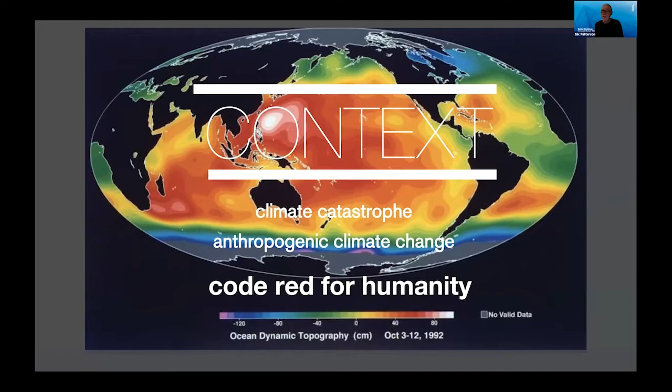I'm kind of hung up contextually on this ongoing climate catastrophe. I have a difficult time getting beyond this, and the most recent report, which the UN Secretary General called a code red for humanity, if you haven't had a chance to take a look at it, didn't have a whole lot of really new revelations in it. But it does compress the time frame. This thing is happening faster than the scientists anticipated, and it's a big deal.

So we all got wrapped up in the pandemic, of course, and I know that myself and others that I've talked to paid a little bit less attention to what was going on with carbon. We made the assumption that with the global economic shutdown, we had to have at least something of a drop off in carbon emissions. And the good news is that we did, in fact, but the bad news is that it was not much.

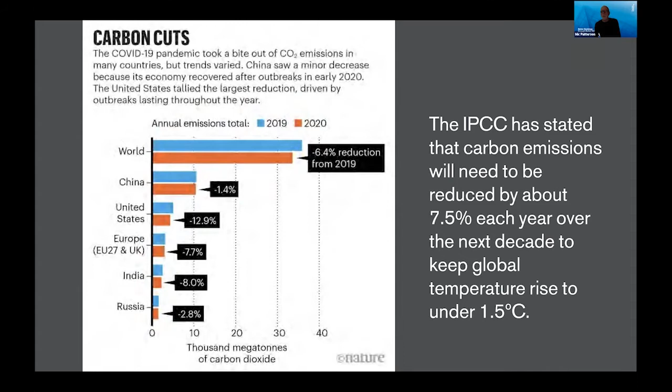And in fact, the IPCC has already stated that we need to reduce carbon emissions by about 7.5% each year over the next decade to keep global temperature rise under 1.5°C. And in fact, last year, with a global economic shutdown, our reductions did not reach that 7.5 level. So this is very alarming and concerning.

One of the interesting things is that there are these constant revelations, discoveries in things that we're doing wrong in buildings, embodied carbon being one of those things that is relatively recent, emerging in the dialogue, particularly over the last 5 years. Another one of these things is thermal resilience. And my friend Ted Kesik at the University of Toronto was just involved in the release of this thermal resilience design guide, which I think is really quite interesting, especially in the context of the wildfires that we have going on out here on the West Coast.

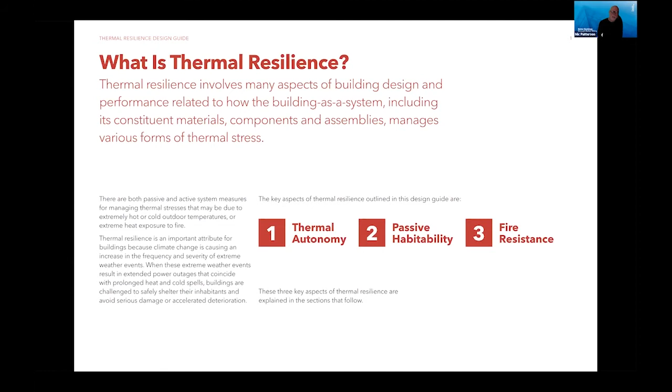And we had temperatures approaching 120 degrees in Portland, Oregon this year. And consequently, I find myself thinking a lot about the ethics of what we're doing, what we're about. And there's this concept of non-maleficence, which is basically an ethical obligation not to harm anyone, right? Which manifests in the Latin phrase that translates as "first do no harm," which we're all familiar with. It has been picked up largely by the medical profession.

We are builders of buildings. This is our industry, and our buildings are problematic. In fact, they're killing us both directly and indirectly. We are all aware of the fact that buildings contribute close to 40% of the carbon emissions that are such a problem.

And this concept of passive survivability in buildings: what happens when the power goes off and you've got a substandard facade system in place, and in a very, very short amount of time, people are in trouble in these kinds of dramatic climate events that are increasingly taking place. So, I'm rooting for disruptive transformation. We have to go through a transformation in the built environment.

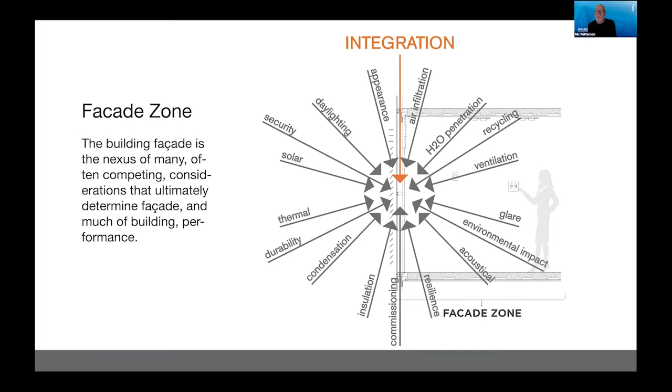And what I mean by that, this is a couple of handfuls of these considerations here, by no means exhaustive, but I think it's really indicative of the uniqueness of the facade system in buildings. And you have considerations like daylighting and glare, which can be in opposition to each other and have to be balanced. Many of these things, in fact, have to be balanced to achieve a fully integrative and optimal outcome in facade design. It's very challenging.

In fact, we spend, according to the EPA, pre-pandemic, 90% of our time indoors. So the indoor environmental quality obviously is of great relevance, and the facade system has a huge impact on that indoor environmental quality. And post-pandemic, I'm sure that it's been significantly more than 90% of the time that we spend indoors.

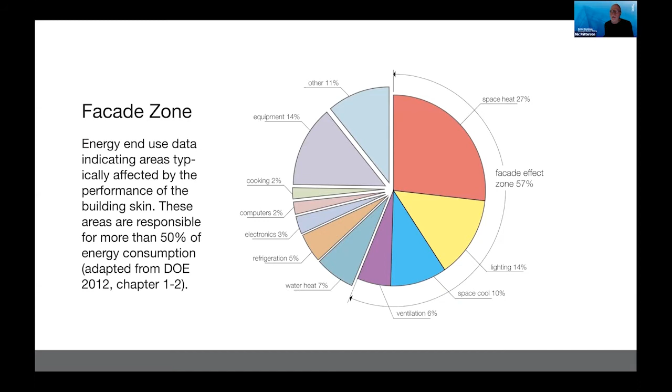From the standpoint of energy consumption, you don't have to go any further than the Department of Energy's statistics to see that in buildings, the facade system has a huge impact, affecting more than 50% of that energy consumption. And as an industry, we've developed a number of strategies and technologies to deal with these kinds of things, ranging from the facade systems themselves to material types, glass types, and integration with shading systems and sensors and controls on the interior.

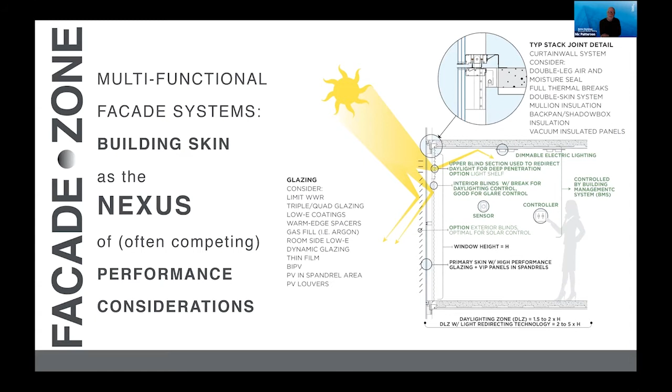So, I was at an event a while back. Bjarke Ingels with BIG Architects was a keynote speaker. And he made a statement that I thought was striking. He said, sustainability is a design problem. And I really hadn't thought about that, but it certainly is, right? Sustainability and resilience both are design problems, which puts us as designers in the driver's seat in terms of solving these problems. And what this is really about is innovation, right? And so we're going to talk a little bit about that today, but I'm talking to a bunch of innovators already, obviously.

We must innovate our way to resilience and sustainability in the built environment. To get from where we are to where we need to go requires massive innovation, right? But how well do we understand what innovation is? And I talk to a lot of people. I oftentimes am not talking to a group like this, which is largely a group of innovators. I talk with a lot of industry people, and even ourselves as creatives.

It's like we've polluted the language, right? A lot of the words that we use, words like sustainability, resilience, high performance, innovation, we think we're communicating with each other, but when you really strip it back, words like sustainability, it's kind of like talking about God, right? You can talk about it, but everybody that you're talking with has a different idea in their mind of what that really is, what it represents. And we've sort of failed to converge on clean definitions for these things, and it's really compromised our ability to communicate about these things, right?

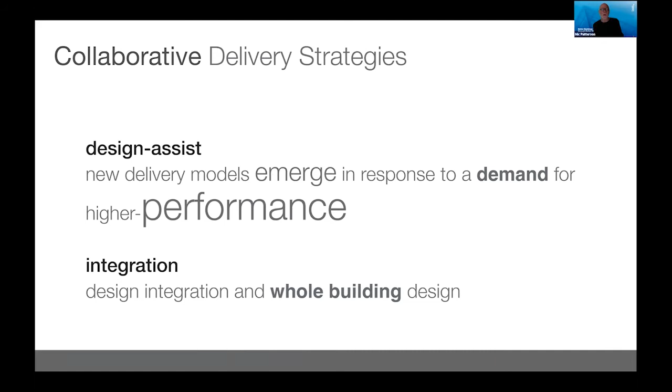And these are represented by Design Assist, which I'm sure many of you have heard of, and probably many of you have participated in. This is another one of these terms that there is no clear definition that we've converged on, right? And so, depending on who you talk to, it'll range from true collaboration to involving expertise as early as possible in the design phase of a project, and getting them to do as much work as possible for free as early on as possible. And that's what I call business as usual, not design assist. But that's a whole other thing.

And then there's a really important aspect of market dynamics that's going on. And there's always this push-pull, right? You've got industry that is pushing products that are ready for adoption, and they're not being adopted. And then conversely, you can have a market dynamic where the design community is begging for, asking for, pulling for new product innovations out of industry.

And where we're at right now, it's been changing a lot. If you look at this historically, there have been long entrenched patterns, but lately these things have been changing much more frequently. But we're definitely in a situation now where it's a push. And what that means is that there are higher performing technologies that are really important that are not being adopted and used in buildings. Part of this is because of a lack of codes that would necessitate their interest. And part of it is a lack of awareness and specification practices, but it's a problem.

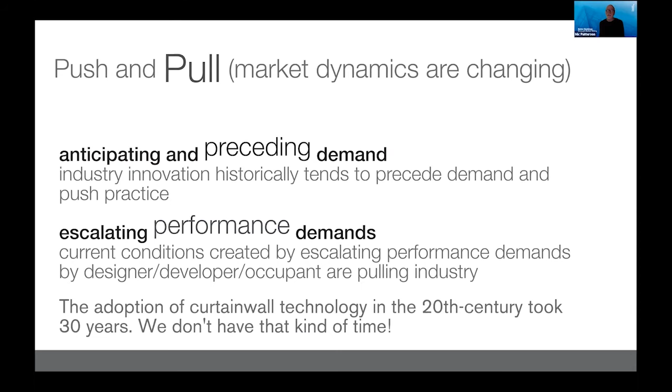The adoption of curtain wall technology in the 20th century took 30 years. In the early 20th century, there were some really innovative curtain wall projects that were executed, implemented. The technology was there, demonstrated successfully, and it wasn't until into the 60s that the technology really took off. In sometimes not so great a form, but that was the time frame that it took off.

So innovation is not something that is magic, like a lot of people look at it, and a lot of you understand this, right? You really have to set the stage for innovation. You have to build the innovation machine. You got to put the dials in place. And once you've done that, you can innovate predictably, reliably, and in a manner that manages the risk that goes along with innovation. This can look very different depending on the kind of organization that you are.

For my own personal exercises, this involved putting together a multidisciplinary team of collaborators, if you will. And we would do research. We integrated research with everything that we were doing. Every project that we did involved research. And a key part of that was starting with the right questions, the best questions. We always took time for blue sky investigation. We always started with a blank sheet of paper. We made sure that we had the right tools for the job for all of our people, no matter what they were doing. And we spent the money to have the right tools.

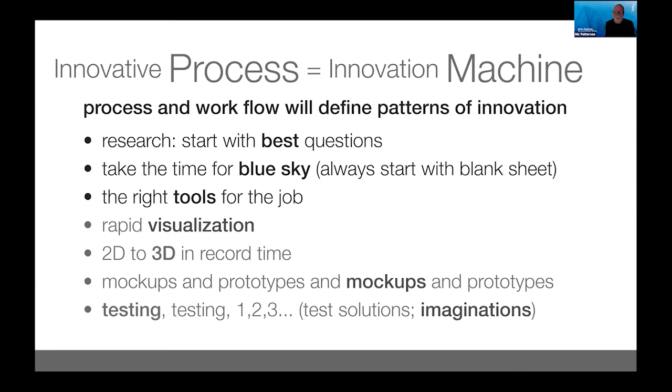So, there are these things. This stuff is stuff that I pulled from a half-day or full-day innovation workshop that the Institute does. So there's not an opportunity here to get into this kind of thing.

But we've all heard this, reward failure, right? But how well do we execute there? How well do we do it? It's not easy to do. And again, it's a principle that's not well understood. It doesn't mean that we let people fail, make the same kind of mistakes over and over again, but carving out room to make these kind of failures and going after them and celebrating them and learning all that they have to teach us is hugely important.

There's some shortcuts, right? I'm into shortcuts wherever I can find them. We need shortcuts now, right, to get to where we need to be in the built environment. Imitation is a great behavior, I think. And the trick is in selecting the source of imitation. So if we're going to imitate something, let's make sure it's the best thing that we can imitate. And then let's push the envelope of that and make it ours, own it, take it to the next level.

And find the drivers of change, right? This is really important. And these are going to vary depending on the project and where you are, and many factors like that. But they can include things like fuel costs. We're all familiar with budget, performance requirements, sustainability. I mean, I've been around for a while, and I recognize the fact that we've been burdened in the U.S. by lax building codes and cheap energy prices.

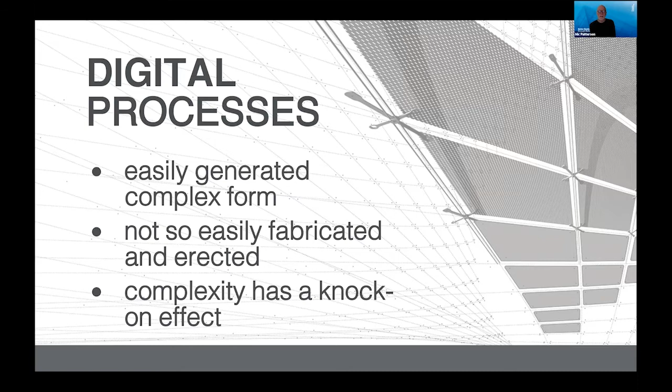So, this complexity manifests in different ways as we move closer to the actual implementation and construction of a building. So they're not so easily fabricated and not so easily erected, some of these innovations. Digital processes have enabled what architecture critic Peter Blake called wet dream architecture, and that's where we're seeing the complexity impact. It's one of the biggest trends, right, in architecture today.

Two big trends that we all recognize: geometric complexity in the building skin, hugely amplified, and also materiality, right? The palette of materials in the building skin. It's not all aluminum and glass anymore, right? These are two of the big changes. And of course, one of those materials that is being investigated at ACAW so beautifully is the terracotta thing.

Complexity versus ingenuity. I mean, basically we are, I believe, as designers, obliged to consider the simplest solution to any given problem and to move from there. And I see evidence constantly of skipping that.

So, design trends that are ongoing: the exploration of thin skins versus deep skins. We saw some deep skin work today. I think of the work of Morphosis and the layering of the facade system, to the point where sometimes it gets hard to tell where the actual barrier between indoors and outdoors is. And there's all kinds of functionality going on there, including the incorporation of public space sometimes in deep double skin structures, like the Shanghai Tower comes to mind, Gensler's project.

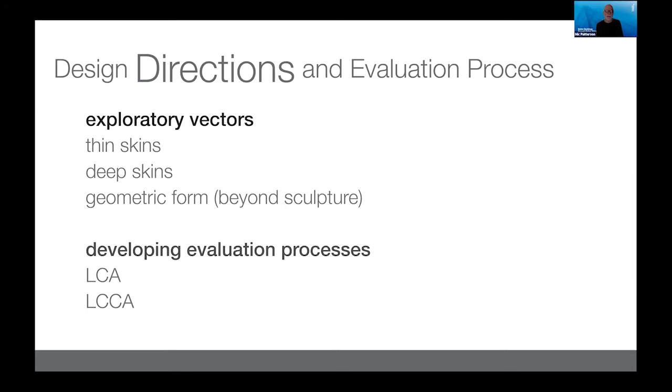And this is LCA work. And then the costing part of it needs to be in a life cycle context, and that's life cycle costing assessment. So materials and processes are a big deal to me.

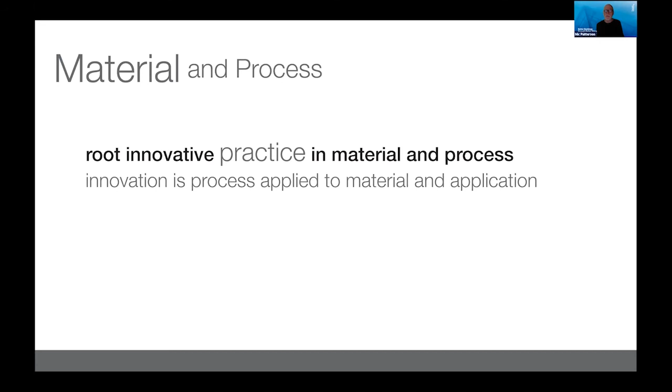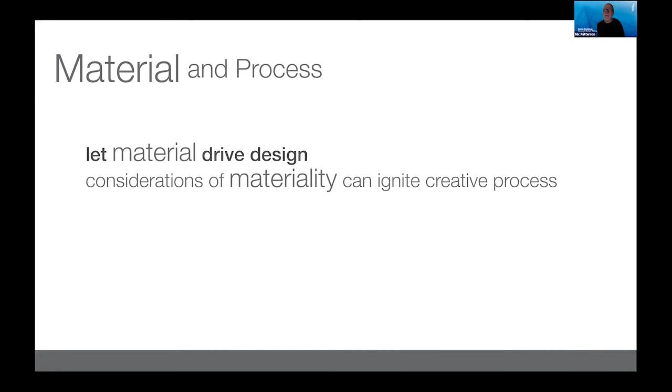Root innovative practice in materials and process. That's always been where I start a design problem, and especially if I'm stuck in a design problem, I look to materials to drive the creative process. And that has been amply demonstrated by the teams today working with these terracotta materials. Deep design is informed by material and process.

And the thing that is alarming to me, as both a practitioner and an educator, is the educational system for our designers, for our architects, in my opinion and my observation, is not very robust when it comes to an understanding of materials and processes. And I think that's something that we need to work on. It's something that my colleague Sanjeev Tanka and I are working on at USC with a facade educational program that we've got in the works there.

Material and product trends, all right? Just a quick look at these: advanced glazings. We know about these vacuum insulated panels, building integrated photovoltaics. We've been hearing about that for a long time, not a whole lot of development or implementation there. Formable materials. I talked a little bit about this already, terracotta being one of these.

The metallic stainless steel, copper, bronze, and more we're seeing in the building skin. Think of the screen system on the African American Museum in DC. Even silicone and silicone joints. There is significant room for innovation in the most mundane-seeming materials and processes. Curtain wall assemblies, we need significant developments there, particularly with the framing and the thermal performance of the framing with thermal breaks and this kind of thing.

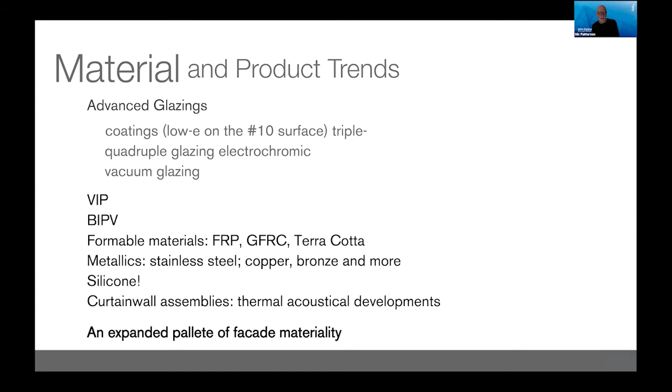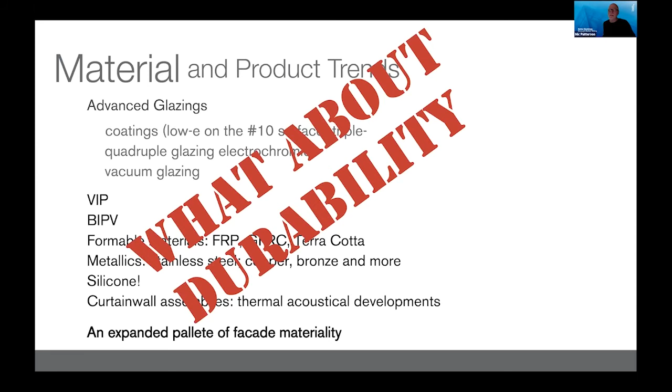So it's important to ask the right questions, right? So revisiting these materials, a question that too often doesn't get asked is, what about durability? That question has been asked and answered with the terracotta material, which is really cool, but in a lot of cases it hasn't been, right? So as an example, let's take a quick look at the insulated glass unit. You have these materials here in the facade system.

In the insulated glass unit, you've got glass, and whatever your spacer is, oftentimes it's aluminum. Increasingly that's being replaced by warm edge spacers. But you have these materials of basically float glass and aluminum. Float glass is an amazing material, right? In addition to its transparency, it is essentially infinitely recyclable. And it has a durability in the building skin that is indefinite. Until it's broken, it's there.

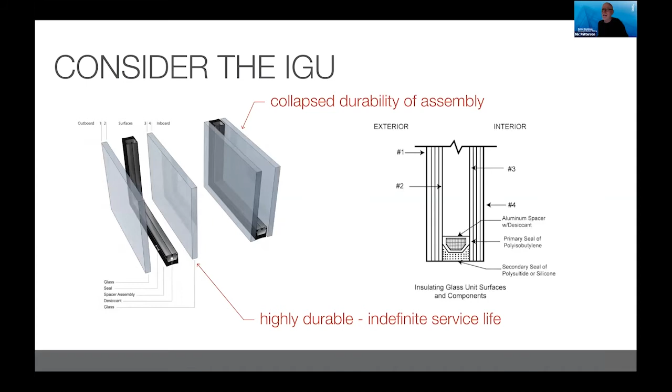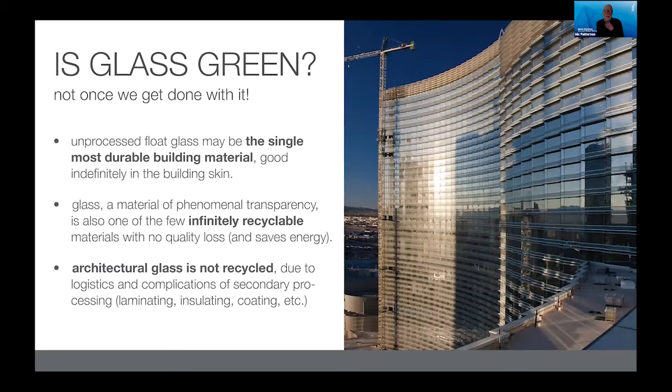So what do we do to compensate for the weaknesses that we're familiar with in glass? It's a poor thermal and acoustical insulator. It has a strange behavior with breakage. So we develop the insulated glass unit, and we take this material that is infinitely recyclable and just incredibly durable. We make the IGU, we collapse that durability down to a 20, 30-year time frame. We make it not recyclable in the process, and we call it high performance glazing.

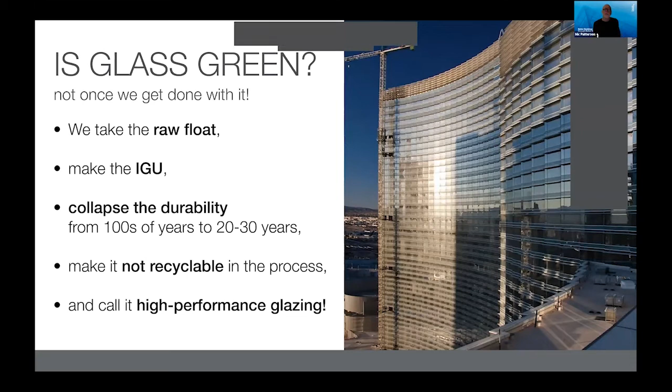This is one of the problems with the nomenclature that we use again, right? We're not considering durability, obviously, or we wouldn't call that high performance glazing. So let's see here. Okay, there we go.

So this is a conceptual exercise that I did myself, and I hold this as an example only of letting constraints drive you to places that you wouldn't ordinarily go. I did a paper on this. It's just conceptual, not intended to be developed for an actual product, but trying to force myself to get my head around: if I'm going to do a product that has the kind of durability that I'm looking for, if it's going to be fully recyclable, you can't be doing low-E coatings. It's got to be disassemblable.

And the constraints drove the design here, right? So this is basically an IGU that you can take apart, and it's not a sealed cavity IGU, which also eliminates the problem of the oil canning of the glass because of the differential pressure. It ended up having some interesting advantages.

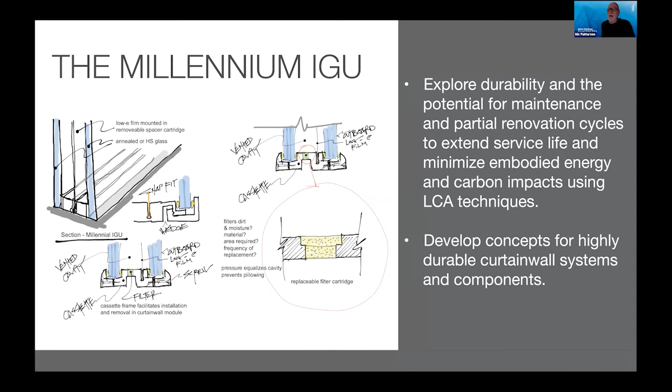I called it the MILLENNIUM IGU because I was initially going after an IGU that would last for 100 years. And once you solve that problem, you realize that 100 years doesn't matter, it can keep going, right? So I called it the MILLENNIUM IGU. And the idea is to design facade systems and assemblies in the facade systems so that, if we don't have the economic wherewithal 20, 30, 40 years down the line, our buildings are still going to be there.

We've got buildings that have been poor performers from day one in the New York environment, for example, that are badly in need of facade renovation and don't get it because the process is so costly and disruptive, right? So we need to really think about this and make this easily accommodated, because these haven't happened during the past decade in New York City in good economic times, right? So we don't want to burden future generations with bad designs. That's going to be a problem.

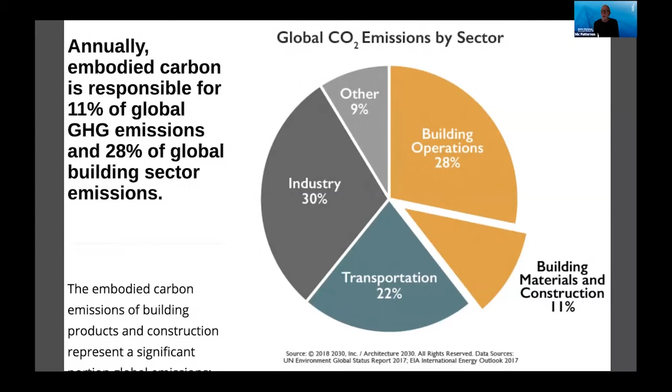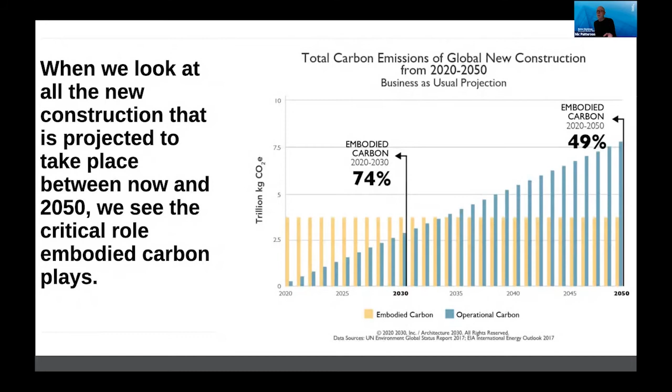So 74% of the carbon represented in this graph here is achieved by 2030. So the operational part pays off over a long period of time. Our focus has got to be on the near term. This is what this IPCC report is telling us. We have even less time than we thought we did to get this under control. So our focus has really got to be on carbon, and embodied carbon is a big part of this.

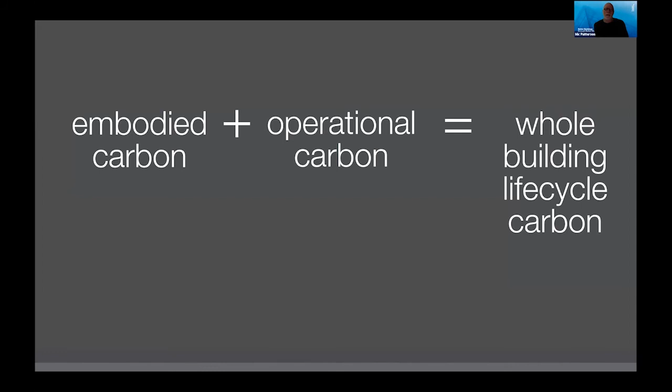So it's pretty simple, right? Embodied carbon plus operational carbon equals whole building life cycle carbon. Pretty simple. This is my contribution to higher mathematics here, right? It's like E equals MC squared. But it does change everything, right?

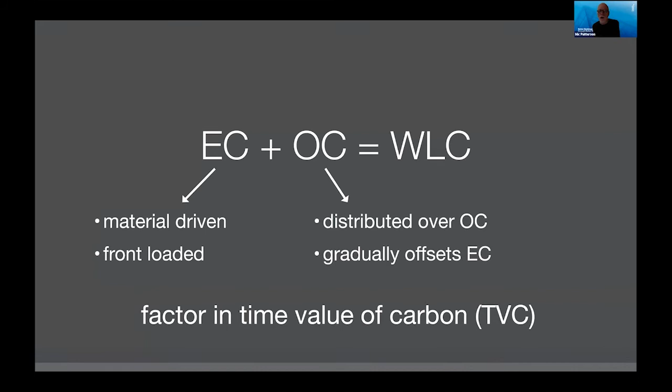And why? Because, this is interesting to me, during most of my career doing facade construction, design and build, we totally ignored the EC part, right? As we were working on improving the OC part, the operational carbon, we ignored the embodied carbon. And the embodied carbon is front-loaded, material-driven. The operational carbon is distributed over the life cycle of the building and gradually offsets the initial embodied carbon load. This time value of carbon makes it critical that we understand this and focus on this.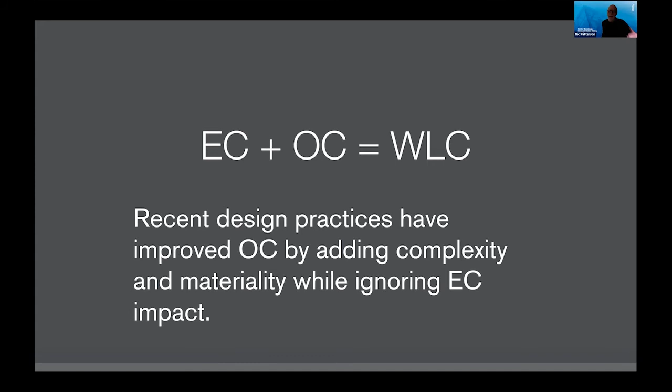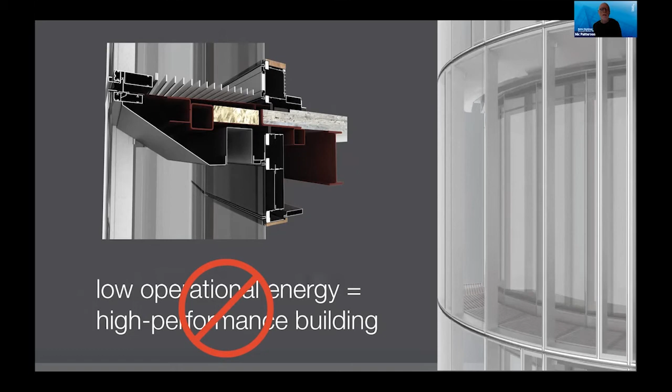And this is a big problem when you're on a mad building streak like we have been over the past decade. So the design practices that I'm talking about have improved operational carbon by adding complexity and materiality while ignoring the embodied carbon impact. So we just completely left that part of the equation off the table, and we would build double skin facade systems with significantly amplified materiality to achieve this operational carbon performance. It was a big oversight. I wonder what other oversights we're currently making.

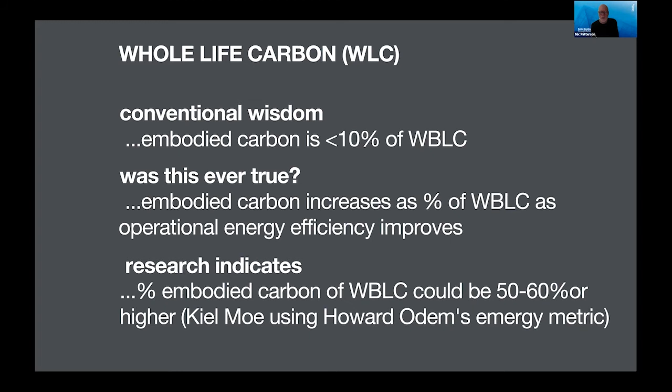So the conventional wisdom at the time was that embodied carbon was less than 10% of whole building life cycle carbon. I suspect that this may never have been true. More recent research indicates that it's oftentimes 50 to 60%, sometimes even higher, depending on a variety of circumstances. My research has been at the center of resilience, preservation, and building science, and it's really focused me on this issue of durability. And when we talk about service life and embodied carbon, material selection and extended service life are the most effective means of reducing embodied carbon footprint, right?

So if you extend the service life of a building or a building assembly, if you double that service life, you essentially halve the embodied carbon. So service life is a really critical factor. It's something that we haven't talked about. I've been involved in LEED platinum building projects that did not even define the service life for the building.

And there's, again, no convergence on how long a building should last or how long the facade system should last. I did some research on this, and for the buildings, it's everywhere from 15 to 30 years at the low end to Anthony Wood with the Council for Tall Buildings and Urban Habitat: they should last indefinitely until we're done with them, and I vote for that. Facade systems range from 20 years to, more curtain wall specific, a 50-year design life.

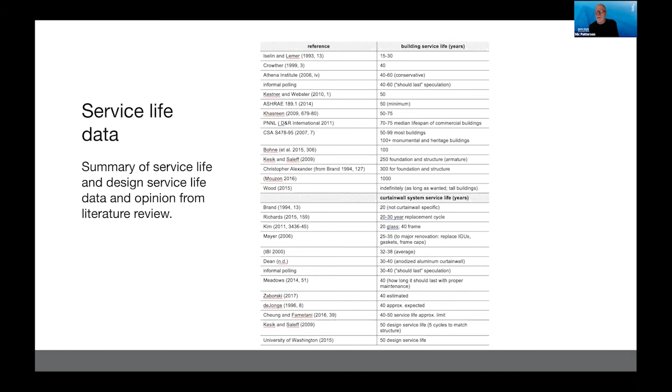Some research, this was from a recent forum that we had at Facade Tectonics on the typical building renewal cycles of the major systems in a building. This is not curtain wall specific. The curtain wall is somewhere between windows and walls. It's closer to the wall, which is approaching 80 years.

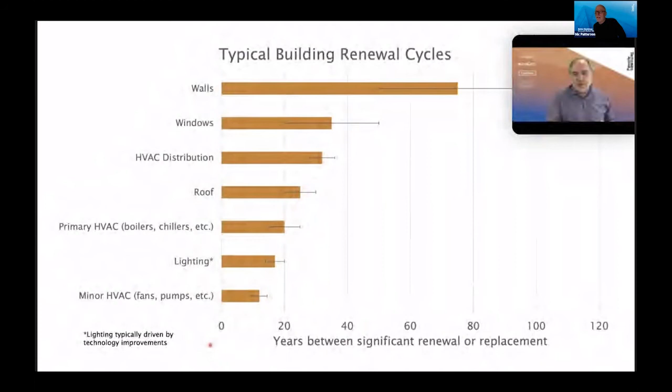And we've got curtain wall systems in New York City that have been in place for 60, 70 years, and they were never designed or intended to be in place that long. The reason is that the original design fails to anticipate the need for future maintenance, repair, and retrofit to prevent obsolescence, and fails to accommodate these processes. So it's very difficult to renovate these buildings.

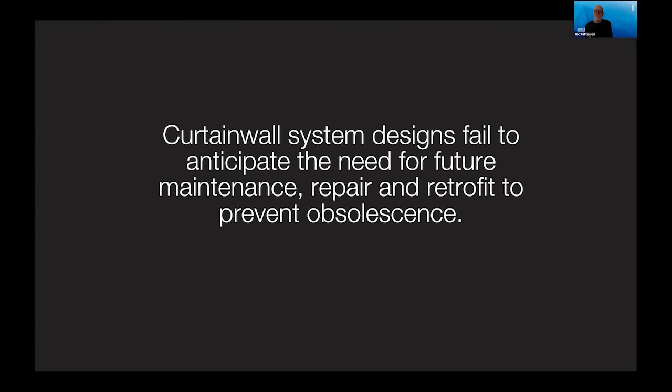And this is in a context where we are expecting the global building stock to double by 2060. That's the equivalent of constructing a whole new New York City every month for the next 40 years. So that's pretty mind-boggling. And it raises the question, are we busy building tomorrow's problems today? My answer is, unfortunately, yes, I think we are.

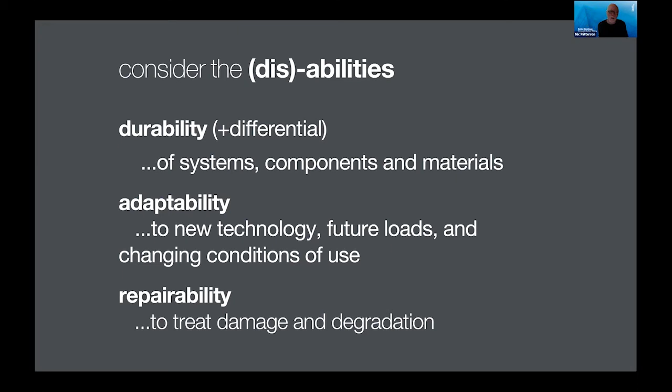I look at the abilities that are around durability, adaptability, repairability, maintainability, upgradability, recyclability. These are not, unfortunately, integrated into contemporary facade system design. I took a quick look at a vanilla curtain wall system and the embodied carbon makeup. And no surprise, 93% of the embodied carbon content of that assembly is aluminum and glass.

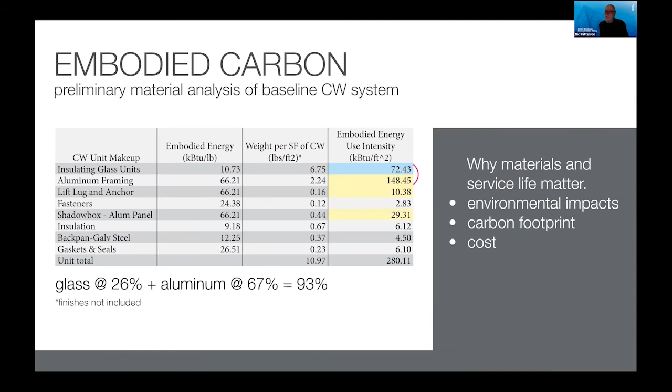What's striking about this is that aluminum and glass are both very long-lived materials. You could go for hundreds of years if they're properly maintained. And what compromises this durability is these minority materials, the 7% of materials. It's the gasketry and the sealants that limit that durability.

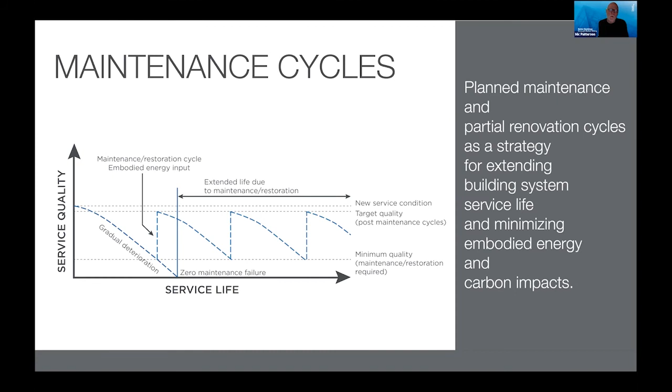So if we design systems where those can be upgraded, we can look at a graph like this, where the service life is indefinitely extended. We don't even have to talk about service life. These systems will keep going as long as we want them to. We just maintain them periodically and cyclically, and we design for that. And if we do that, we're going to design very different systems than we do now.

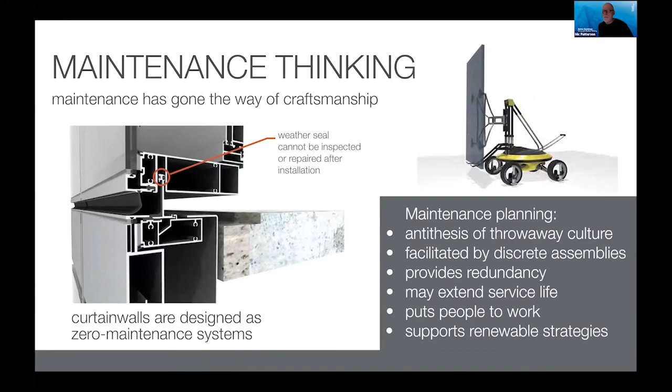Some of you will recognize a stack joint on the left-hand side here. This is an upper unit sitting down over a lower unit, and the blade reaches up inside the upper unit here. This is the business end of the curtain wall system, the air and weather seal. When we install this thing, it's the last chance we get to even see it. We can't inspect it, much less repair it. So it's a very different way that we would design the facade system with these kinds of drivers.

If we look at other facade futures issues, what I see coming at us, and I'm rooting for this and expect it, is some significant disruption over the next 5 to 10 years. My crystal ball is as muddy as anybody else's, and I can't tell exactly when, but I'm confident that 10 years from now, facade systems are going to look significantly different than they do now.

I think we're going to rediscover the value of opacity in the building skin. And we're going to move towards more plug and play facade systems that are much more adaptable, easily changeable. Climate change is one thing, social change is another, and social change is accelerating too. And these systems need to be very responsive to these changing conditions of use.

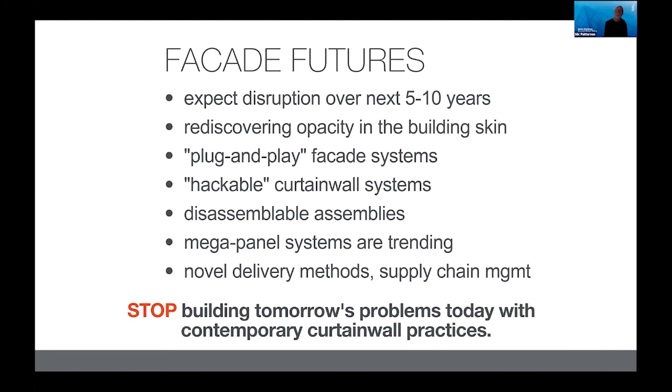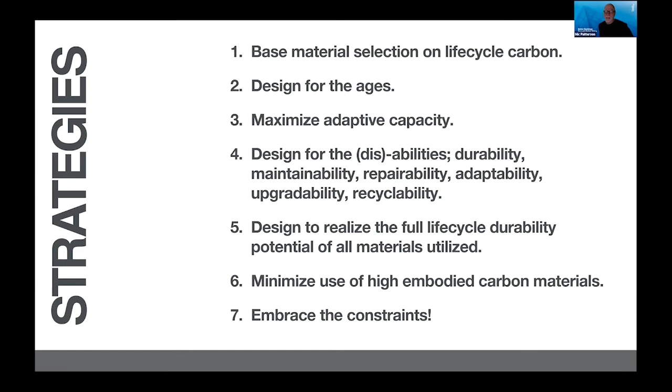So, this is the thing. Stop building tomorrow's problems today with contemporary curtain wall practices. Short strategies for doing this: base material selection on life cycle carbon, design for the ages, maximize adaptive capacity, design for the dis-abilities, design to realize the full life cycle durability potential of all materials utilized. That's a challenge. That's a constraint that will drive change in your design. Minimize use of high embodied carbon materials and embrace the constraints.

So yeah, the buildings that we produce today will ultimately be judged on how well they serve humanity in surviving the climate catastrophe through upcoming decades and centuries. Think about this. All of us as designers need to think about this as we do the design work that we're doing today.

Innovation and collaboration are intimately linked. Professional, academic, industry R&D collaborations hold tremendous potential. And I am blown away by what I've seen today with ACAW and what these teams have done, what these players have done. I want to extend my personal congratulations and the congratulations on behalf of the Facade Tectonics Institute. I think this is really a model that can drive change in our industry. I celebrate it.